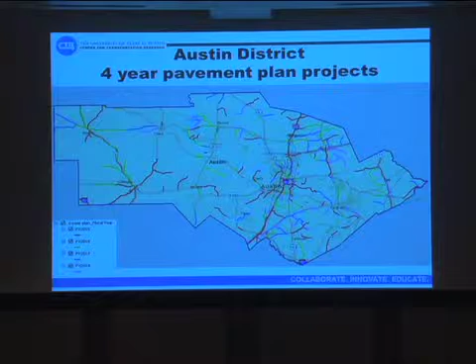And then the next thing again is, how do we take into account impacts due to construction? So this is an example that we talked to Mike about, and we first talked about either commercial or residential construction. This is an apartment complex.

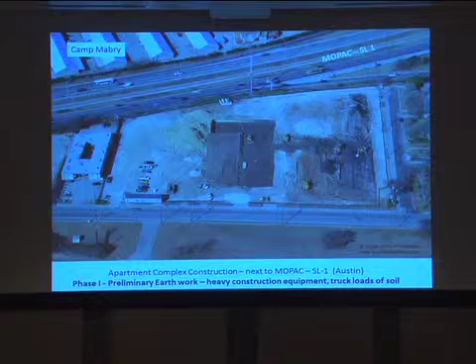Oh, I don't even have the microphone on. Can you, I guess you can all hear me okay. Okay, let me see here. There's the pointer. Well, yeah, okay.

So this is an apartment complex. This is Mopac, which is a major crosstown expressway in Austin. This is Camp Mabry, for those of you familiar with the district. And this is a big apartment complex that was being constructed. This is a local street, Bull Creek, and I travel that every day.

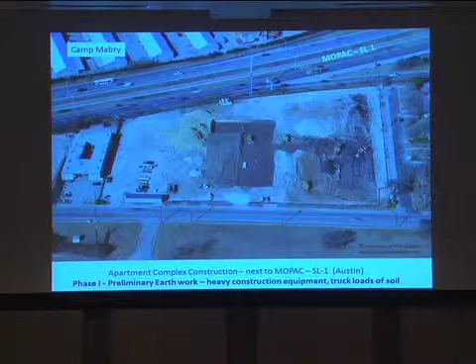As this was being built, I got to see what the impacts were to me, my car, and how the condition of that roadway changed over time. But we're interested in this because it helps us see the different phases and what kinds of trucks, how many trucks, what kinds of heavy equipment are coming in at different phases of the construction.

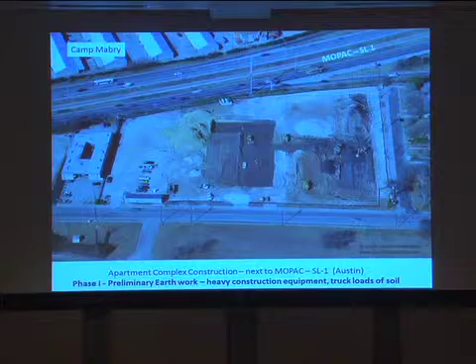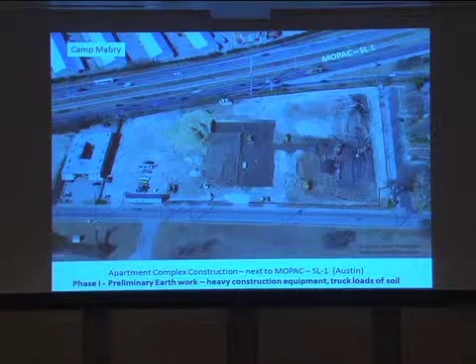So this is phase one. They're doing the preliminary earthwork, and they're, of course, bringing in heavy equipment, bulldozers. A D10 on its transporter weighs about 200 to 240,000 pounds. So you have different sizes and kinds of equipment that has to be brought to the site, and you have truckloads of earth.

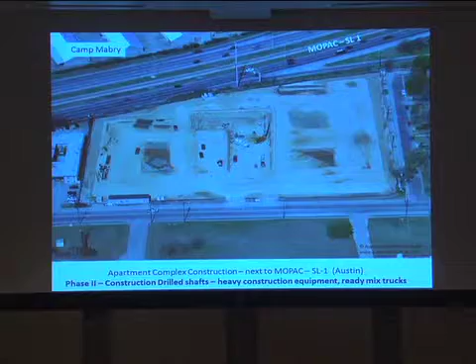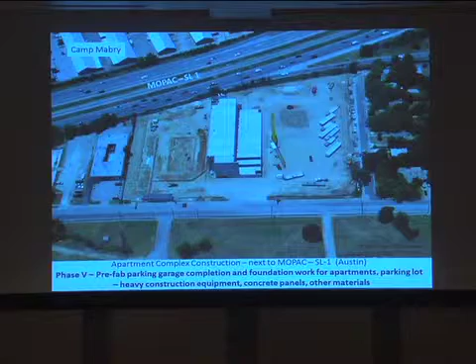As you progress, you start doing drilled shafts for the foundation, in this case, of the parking garage, and you're bringing in ready-mix trucks, which weigh 69 kips each, unless it's an SHV with additional axles. Then you're doing utilities, then bringing in prefab panels to build the parking garage, and additional site work to start the foundation for the apartment complex itself and prepare for the parking lot. You're bringing in concrete for that, and wood trusses.

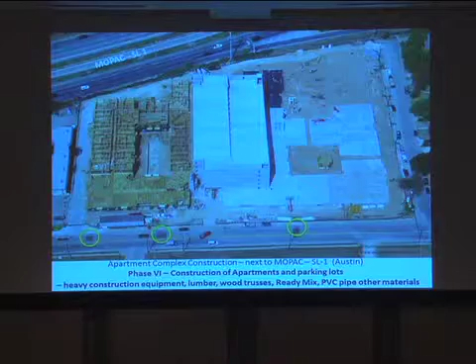You start seeing patches showing up now in the project as repairs are being done, and this is actually right at the project. The roadway was actually in better condition than further back up the roadway, and I can attest to that for what it was doing to rattle my little Toyota Corolla as I drove along this route each day. Then further construction on the apartment itself, and finally the roofing and so forth.

So there are identifiable phases, different identifiable kinds of equipment, truckloads of materials, and numbers of truckloads of materials that are necessary to build this apartment complex.

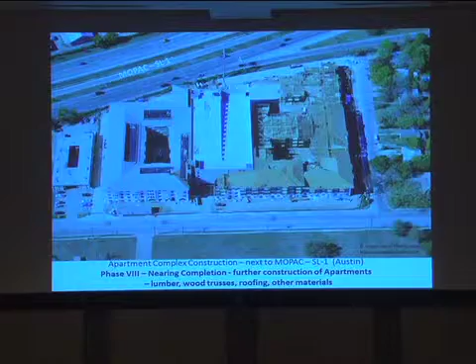What impacts is that additional traffic going to have on a project you've got planned maybe for next year? Do you need to change the timing or the design of a project you've got two years in the future, if you've got another apartment complex that's going to be built in the area? So that's the focus of this study.

If you're talking about commercial or residential construction, you can get construction permits from the city. They provide a lot of basic information about the proposed time frames and so forth, the type of construction. We anticipate that, knowing the size of the apartment complex and how many units, we can convert that into numbers of truckloads of different kinds of materials. What are the origins and destinations for the different kinds of materials — ready mix, hot mix, lumber, and so forth?

And then how many equivalent single axle load applications are we putting on these different routes, depending upon what the origins and destinations are? And then, is it impacting a planned pavement project? Should the project be delayed? Should it be accelerated? Should you add a project on a route that's going to be receiving heavy traffic from this construction?

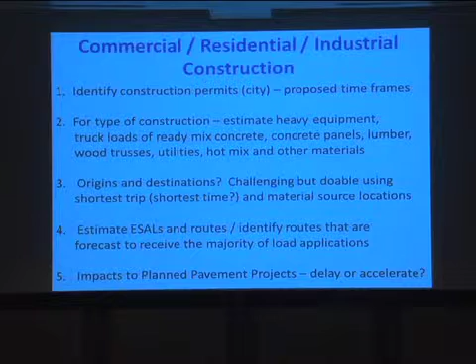So we again talked to Mike about the idea. He said, let's do a case study, but instead of doing construction for commercial or residential, I want you to do fracking.

So we started looking at three counties — Caldwell, Bastrop, and Lee counties — which are part of the Eagle Ford Shale region. And we looked at, just like we described for residential construction, what are the different kinds of heavy equipment and materials that are going to be needed to do the fracking.

So we started identifying the sources of the information. For fresh water, which is required for fracking, we got that from TCEQ — where are all the freshwater well sites in the district? For quarry, for sand, where are all those quarries located, or how many are there? We got that from TxDOT. And then for saltwater disposal, where are the disposal wells?

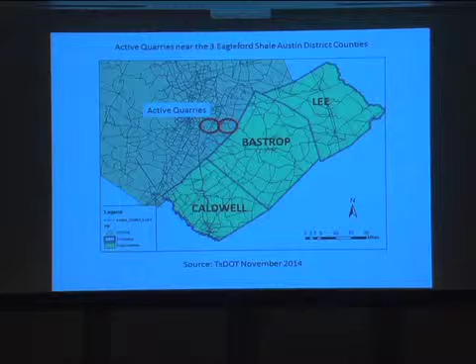So we gathered that information and started plotting it in a GIS platform. We got the quarry information from TxDOT. We ended up with 84 quarry sites, not only within the district but outside it, adjacent to these counties. We also found there's actually a public website, national in scope, called FracTracker, where you can look at TxDOT data.

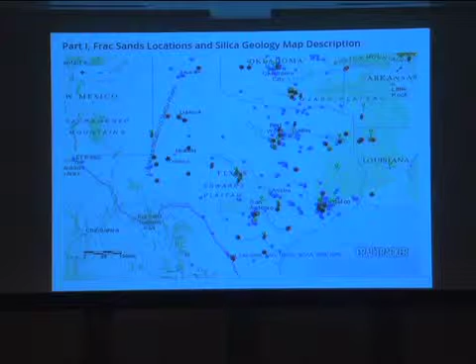You can zoom in and identify where the quarries are that produce frac sand and other kinds of materials. So we were able to get that information, which gives you the location and GPS coordinates of each quarry site.

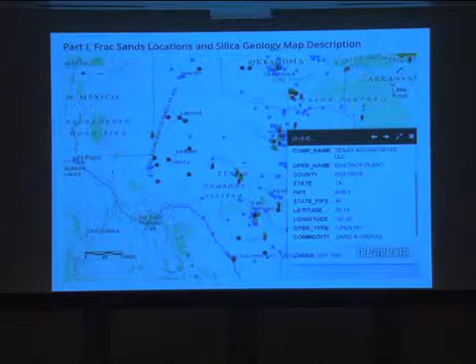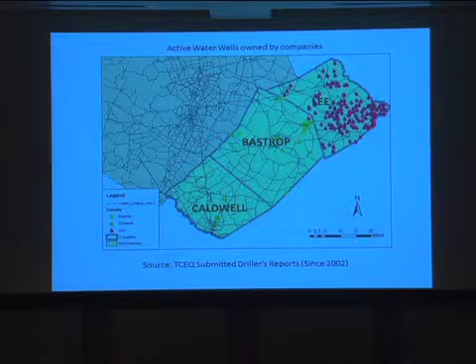And that's an example. We then got the freshwater well locations for each of the different frac counties, and pinned them down with GPS coordinates. The water injection, or wastewater or saltwater injection wells — where are they located? And then finally the wells themselves, where the permits were obtained from the Railroad Commission — where is a new well planned to go in.

So we were able to put together all this information, which essentially gives you your origins and your destinations for the truck trips. We ended up with the locations for 514 water wells, 84 quarries, 317 disposal wells, and 600 well permits.

We realized that we needed to look at not only the locations of these different facilities within the district, but outside it, because the closest location for, say, water for a well inside the district might be in a county that's outside the district. So we had to look both ways.

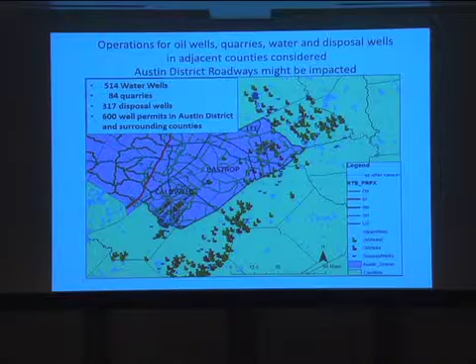Again, once this was put in a GIS platform, we had all the origins and destinations, but then how many truck trips would each of these activities generate? We used information developed through a CTR study led by Jolanda Prozzi and a couple of students, and Jorge Prozzi, where they looked at the energy sector and specifically the kinds of equipment and truckloads associated.

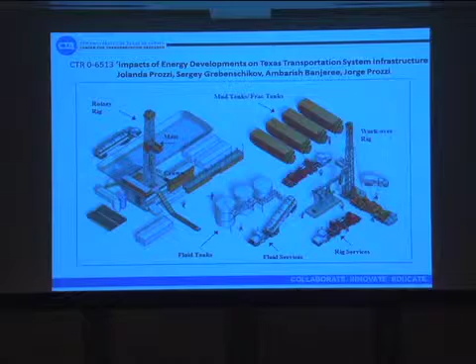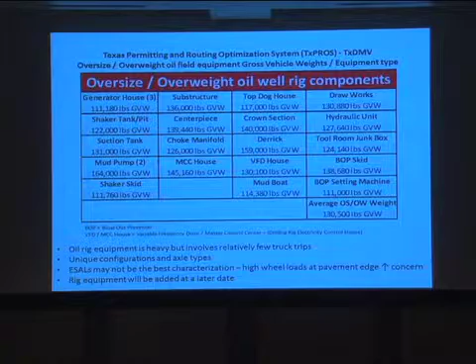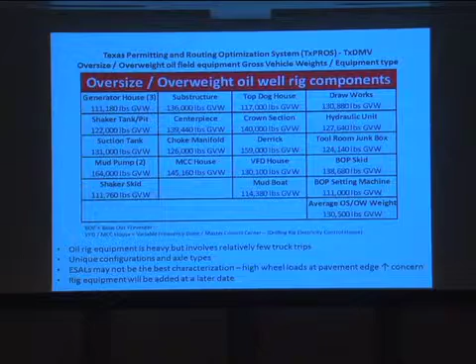This is a typical frac site with the different kinds of equipment that are there. We also obtained from the Texas Department of Motor Vehicles, from TxPROS, the oil well equipment data for 3 years, all of the oil well equipment movements in the state and what they were and how much they weighed, so we could understand how much the heavy equipment brought in to actually put the well together weighed. And again, it tends to be very heavy.

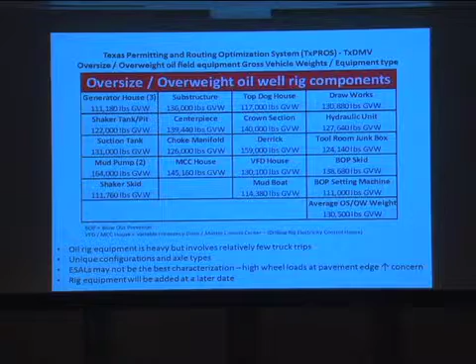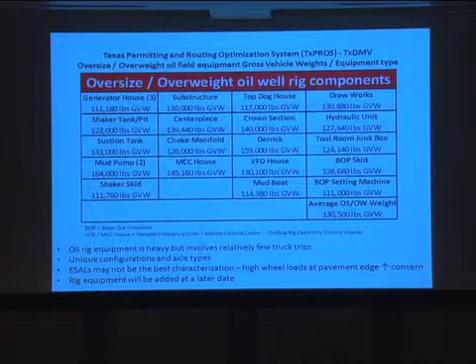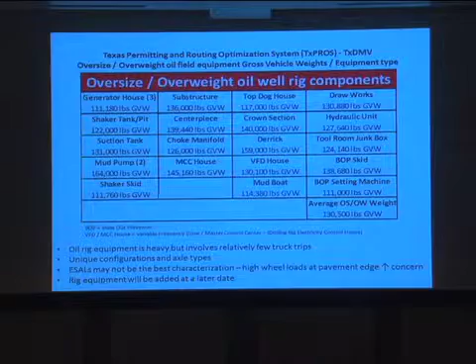It's relatively few trips compared to the actual fracking operation, but the weights of these loads can be quite high. They're usually unusual or unique configurations, so it's a little difficult to apply the AASHTO equivalent single axle load concept to these kinds of vehicles, but we do recognize that they need to be considered, and in particular from a different perspective, not just loads on the pavement, but safety.

As the presenter in the last presentation showed, there are concerns anytime you have heavy truck traffic, heavy oil well equipment traffic running along narrow roadways without shoulders. You have concerns about edge drop-offs, edge failures, and the crashes that can happen. So there could be, in the future, a safety component looked at in addition to the impacts to the projects due to loadings.

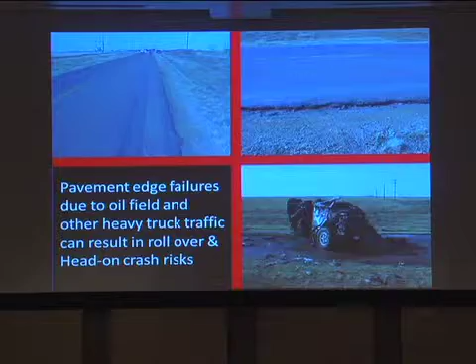So again, from the research and from additional analysis, we had an idea for a particular well, how many truck trips, how many of different kinds, would be necessary to produce one well or multiple wells.

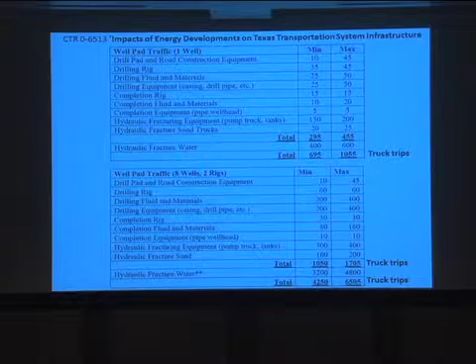We used that information, and in the conceptual framework for the GIS system, since we knew where all of the different activity components were located, we could plot those out, then determine shortest trip lengths between each well and each of those three types of materials: sand, water, and injection.

We then could assign how many truck trips, and then how many ESALs were going to be traveling along that shortest route. We then generated a list of all of the routes in these three counties that are going to be carrying at least some level of oil field traffic. And so we generate those trip tables.

We identify those that really aren't going to be carrying that many truck trips, and we focus on the ones that are carrying the heaviest loads. And then we do more analysis of those particular sections. So this is an example of kind of what you get in the GIS platform methodology.

As I said, ArcGIS itself has the ability—there's an algorithm within ArcGIS that will tell you what the shortest path is between an origin and a destination. So it runs that algorithm for you. We can determine the shortest distance or shortest route on your roadway network between this well and a freshwater site, between this well and a saltwater disposal site, between this well and a quarry.

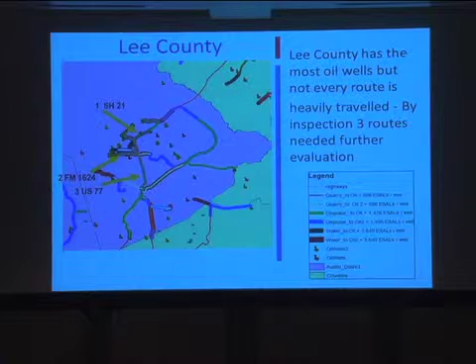State Highway 21 had 24 wells, so 24 wells times the number of ESALs for a particular type of operation. In this case, 24 wells times 686 ESALs per well for quarry operations, 24 wells times 1,456 equivalent single axle loads for saltwater disposal, and then 19 for freshwater. There's a difference there because the shortest route may not be the same for every well that you're looking at, so you might have differences there.

In this particular instance, that section of roadway would, under full operation of fracking, have about 120,000 ESALs applied to it. Based on information from the Railroad Commission and other sources, from the time a permit is issued to the time they start work on the well site is usually about 50 days, and most of the traffic is applied within the next 2 weeks. So the majority of 120,000 ESALs are being applied to that route within about a 2-week period.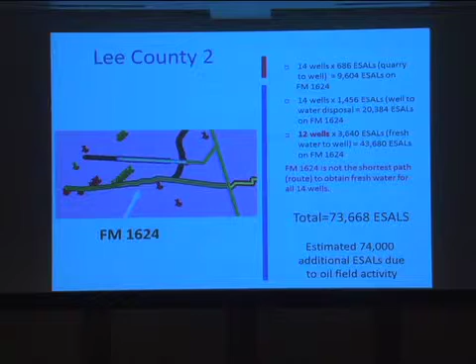The next one was FM 1624. We came up with about 74,000 ESALs for this FM road. When thinking about the impact, we have to consider the existing pavement structure, the remaining life of that structure, and how many additional ESALs we're now putting on it in a very short period of time. There is a project scheduled, but it's not a paving project, it's a safety project with guardrail and extended safety culverts. So that's an opportunity to think about whether to do something on this route where I may be carrying an additional 74,000 ESALs.

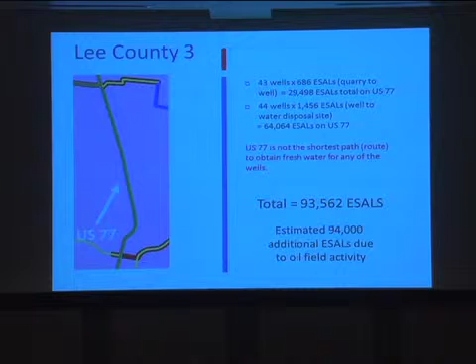The final section is US 77. This is about a 5.7-mile long segment, and based on the same methods, we estimated about 94,000 equivalent single axle loads being applied to this section of roadway. It does have a pavement project planned for 2018: a seal coat, a level up seal, and an overlay.

Looking at the big picture, this is within Lee County, looking at these routes. This is 1624, 1.3 miles long. It's going to get an additional 74,000 ESALs. It's going to have a safety project, but no paving is currently planned.

Then we have another project which is 5.7 miles long, US 77, with an extra 94,000 ESALs, planned for 2018 with a level up seal coat and overlay. And then finally, State Highway 21: there are no projects planned for this segment of roadway, but it's going to get an extra 120,000 ESALs.

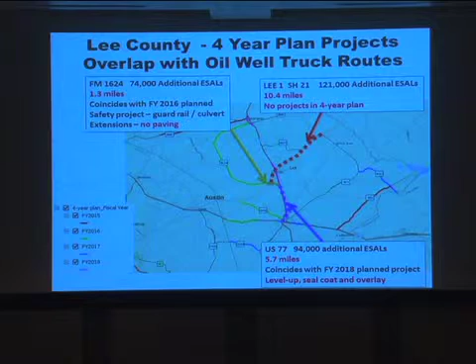This provides Mike and the district with an idea of what the impact of fracking will be in this area, and how that impact can be addressed proactively through the 4-year plan. Do I need to accelerate projects? Do I need to delay them? Do I need to add projects? This was a case study we conducted for him, and we see other opportunities for expanding this to commercial and residential construction, industrial construction, and other areas.

Right now the price of oil is low. Back when we were doing this original work, it was up around $100 a barrel, and fracking was in full swing. Now it's less than $50 a barrel. If you look at NASDAQ, many companies need about $80 a barrel before fracking is worth doing, although some can operate at 50. Right now some fracking is going on, but not like it was a year and a half ago. Nevertheless, the information is there and available for the district to consider how they want to use it in their 4-year plan.